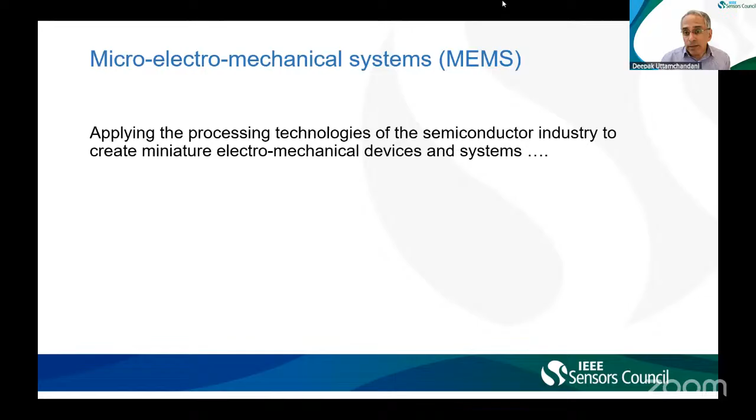Okay, so now everyone here knows what MEMS are. So it's applying the processing technologies of the semiconductor industry to create these micromechanical devices and systems. And why do you create them? For this reason, that there are numerous applications of these devices. These are just some of the examples.

In sensing and instrumentation, you have these devices. In communications: RF switches, resonators, impedance tuning, photonics, so many applications in comms. In transport, all the vehicles most of us travel in nowadays, you have accelerometers, pressure sensors in your vehicles. These are all MEMS-based products. In aerospace, you have MEMS devices for guidance and navigation.

In medical technology, you have them. In life sciences, you have them. And so there are many papers out there that describe these applications. So I don't want to focus too much time on that, just to remind you that the applications are quite diverse. Okay, so what has been our experience with using MEMS foundries? These may not apply to every single person, but this certainly is how I think about it.

So if we look at the plus sides, the advantages of doing this, then we see that the foundries provide to you a reliable process technology, which they have already developed. They have invested the money and time to make sure that these technologies are available to us as the users. So that technology is already readily available.

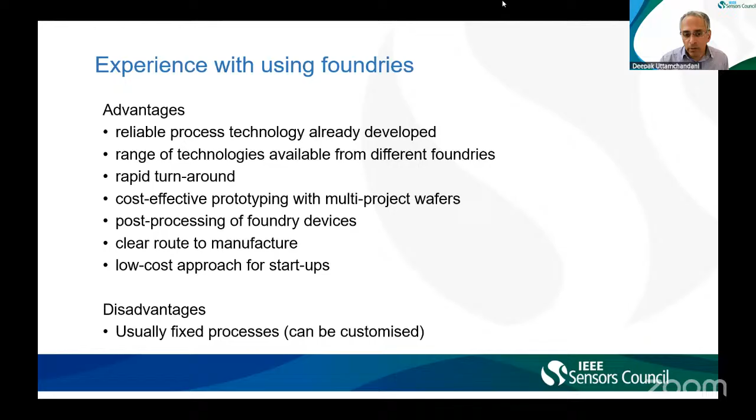So the one main disadvantage I'm showing over here is that with foundries, you usually have fixed processes because they have spent lots of money, lots of time to optimize their processes. Now, if you come along and say you want to change this, you want to change that, generally speaking, they will not be receptive to you. So that is something you have to bear in mind when you're trying to go down this route.

So here are some illustrations of devices that we have worked with for many years. And these are actually using different processes. So here on the first diagram, these are all scanning electron SEM images, okay? This is a very interesting device. It's what we call a latching RF switch. And what's going on here? So RF is radio frequency.

And this side of the image over here, where I'm showing you, this is an RF waveguide. In fact, it's a microwave waveguide. It's of the GSG configuration, meaning ground signal ground configuration. So through this center channel over here, microwaves will travel. Now you can see what we have designed over here.

We have designed this break in the waveguide, which is connected to this mechanical system over here. And the idea is that I can use these micro actuators, all these MEMS devices, and I can pull this structure to the left. If I pull this arrow-shaped structure to the left, then you can see that this waveguide is interrupted and the signal flow will stop.

If I push this arrow structure to the right, then this arrow fits into this gap, and then there is good continuity and the signal will transmit through. The important thing here is that this movement is handled by these micro actuators.

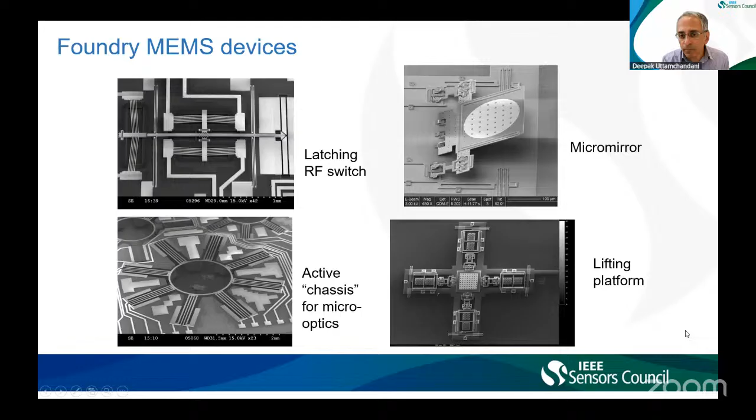Okay. So let me describe the first of the three processes I want to discuss with you today. And this is about the polysilicon process. In the past, when we were using it, it was called the PolyMUMPs process, and it was provided for us through the MEMSCAP Foundry based in the US, but it has been taken over, and the new owners, who are the Science Foundry, call it the polysilicon process, but it's essentially the same.

So I don't want you to focus on all the details over here because it's a complex structure, but just bear in mind that in this process, we have three polysilicon layers, okay? Poly 0, poly 1, poly 2, that's three layers. We have deposited oxides, which are sacrificial, so that's the oxide layer there. We have silicon nitride, which is the black layer here, which isolates the device from the underlying silicon. We also have metal. So this is our toolkit.

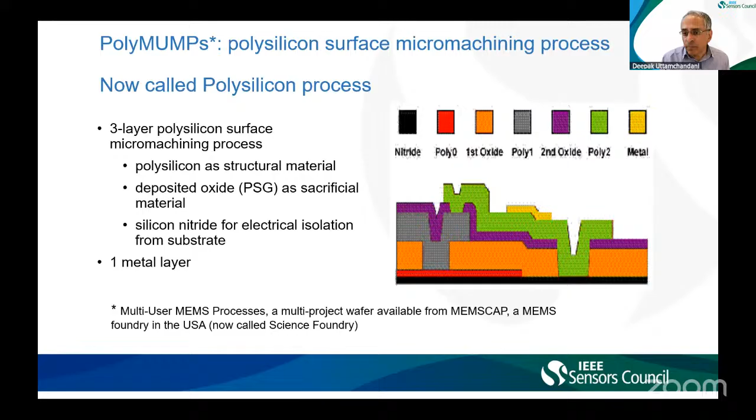So what do I have in my toolkit? I have in my toolkit these 7 layers. And I have the ability and creativity to do something with these 7 layers, how to design with them. So what can I do with them? So let me show you the first device we have. This is a device which is a micro actuator. It's called the SDA, a scratch drive actuator.

So first I'll turn your attention to the right-hand side of this slide. And in fact, these two pictures are the same, except the lower picture is in color to make it a little clearer. And what I've done is I've designed this device over here, and you can see the corresponding layer. So we have parts of the device called clips. They are made in poly 2. We have this gray plate, which is also poly 2. We have bushing, and I'll explain that to you. And we have the sliders, and we have the rail, which are in poly 1 and poly 0. So these are all the layers of the polysilicon process, okay?

What is this and how does it work? So it's an actuator, a micro actuator. And the left hand here shows you what it is. So here is the silicon substrate. This gray represents the insulation, which is the silicon nitride dielectric. And this L-shaped piece over here is also polysilicon, okay?

And if you look at it, this is like a capacitor, because if I apply a voltage between the top and the bottom, the top may have a positive charge, the bottom may have a negative charge. And what happens? If you have a positive and negative charge, they attract towards each other. So it means that this very thin bit over there is attracted to the bottom and it bends downwards.

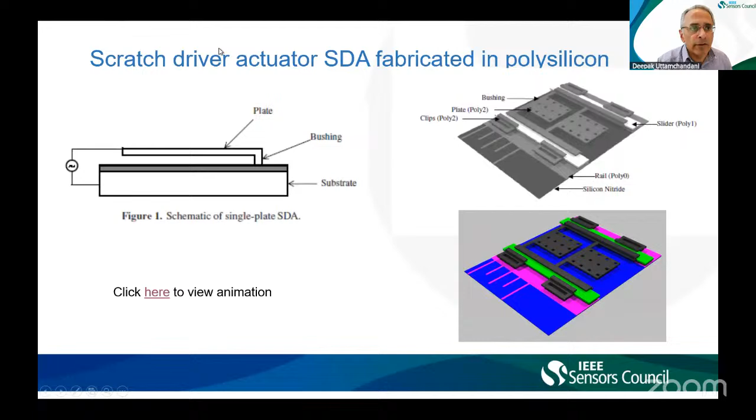So, where am I? Close. So I've lost myself. Why have I lost myself here? Okay, sorry about that. I think I was trying to do these. Some of these are old recordings, so I had to make some adaptations to them. Okay, and it might jump around a bit. So let's see if we can avoid that. So let me move to the next slide.

This is an actual image, a recording of this micro actuator. We call it a three-stage actuator because these three squares represent each stage. And now if I click on this, you can see that it moves forward. It's moving forward at an average velocity of 20 microns per second. But you can clearly see that it's moving from 0 up to 900 microns, almost 1 millimeter. So this is one of our first micro actuators.

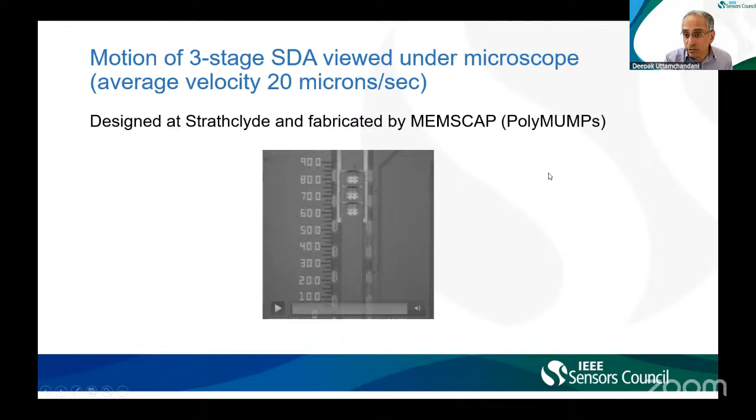So when we built this type of device, the first thing we thought was, well, this is a great device, but how much force does it produce? Because if you have an actuator, your actuator is trying to do some work. And usually that work is it's trying to position something, it's trying to pull something. So we built this simple structure here. It's a test structure to try to measure the force of the actuator.

And what you see we have over here is what's called a box spring. It's a spring. And when this actuator operates, it pulls and stretches the spring. And when the equilibrium is achieved between the force of the actuator and the restoring force of the spring, we can actually measure the displacement of the spring. And if you know the spring constant, and we actually work out the spring constant by calculation, if you multiply the spring constant by displacement, that product has units of force.

So you see here we have a diagram which shows different actuators from 1 plate up to 4 plates. Here we have worked out the force, and here we have worked out the voltage that is actually applied. So you can see that, for example, I can get something like 900 micronewtons of force out of a 4-plate actuator if I apply like 200 volts to it. So this gives me some understanding of what kind of objects I can push and pull using these actuators.

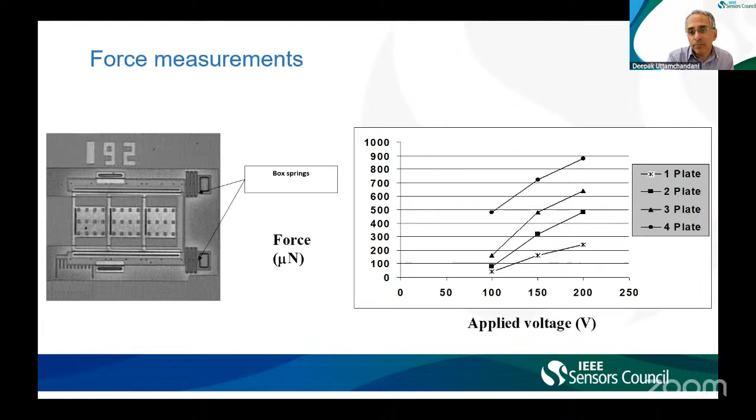Now, if I click this slide, you see what happens. You see how this mirror has now been pulled into the vertical position. So in doing this, we have applied this actuator to, yeah, okay, now I know what I'm doing. I need to pull this down and close that. Okay, so we've used this actuator here to pull up this mirror. It's doing something functional. The mirror is going from horizontal to vertical.

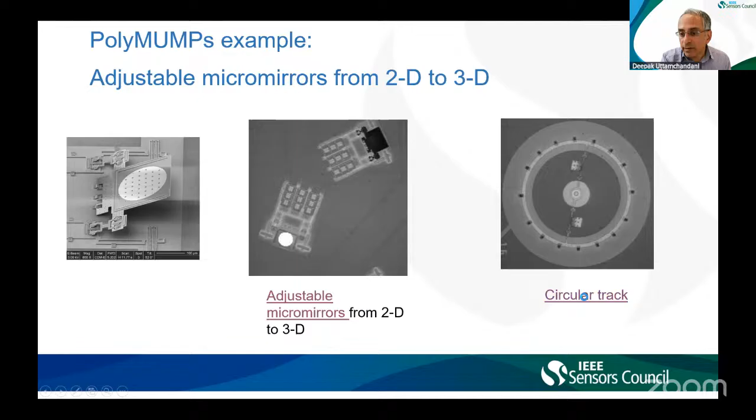This slide here shows you that these devices don't necessarily have to move in a straight line. If I click here, then you can see that I can also make a circular motion using these types of actuators. So they are not always linear, they can also be circular.

Okay, so quit that and I'll close that. And I'll move to the next slide. So those are some examples of the polysilicon process, and there it requires a really good understanding of what you're doing. Now, this is SOIMUMPs. Nowadays, it's called SOI process.

And I believe last year, those of you who were trained on the MEMS course were trained on using this process, SOI process. So I won't go through all the details. I just want you to look at F over here in the bottom right. What this allows me to do is create a silicon structure which is completely suspended. It's suspended because using a back etching process, I can remove all the underlying substrate material.

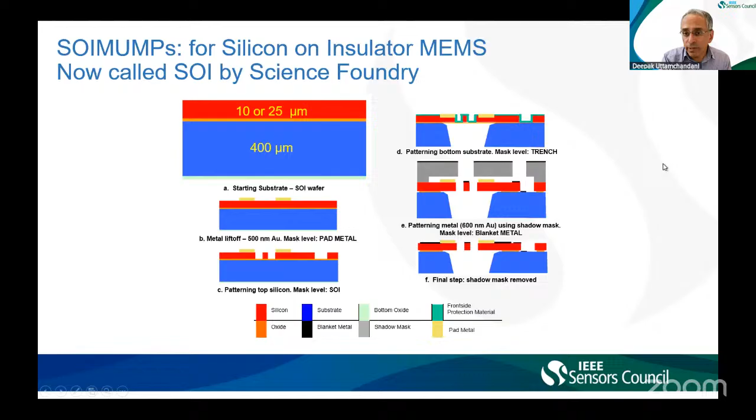And then on the top side, I can put in different types of materials. Usually we use metals. So this gold structure is what's called pad metal. There's pad metal and there's blanket metal. But these are definitions which I think you will have understood through your training. So what do we do with this type of process? Here's one of the devices we made early on.

It's again a micro mirror because, as I said, our interest is in optics and photonics. This is a circular micro mirror. It's 800 microns in diameter. And on this side and on this side, we have what are called electrostatic actuators. The thing about electrostatic actuators is that one set of actuators is connected to the structure, one set is connected to the surrounding silicon. So you have, again, like a capacitor, and that capacitor generates a force within it.

So here we have done two simulations. The diagram on the top shows the first modeled tilting mode of the actuator, and we modeled it to be 11 kilohertz. When we measured it, it was about 10.2 kilohertz. So there's good agreement. And the tilting is around this axis over here, so it's tilting from side to side.

The second mode, we'd say it's a second tilting mode. It has a 42 kilohertz model, and when we measured it, it was 41.7 kilohertz. So again, there's good agreement. And here you can see the tilting almost follows this S shape. So you can see how this mode is quite different from this mode over here.

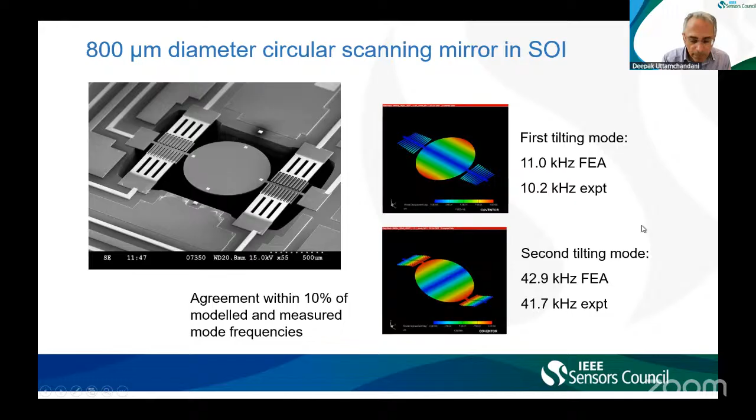Just checking my time here.

So this is a different variation of the previous structure. The only difference is that instead of a circular mirror, we have a square mirror. We wanted to understand the effect of having these square corners on the overall design and the overall production of the structures.

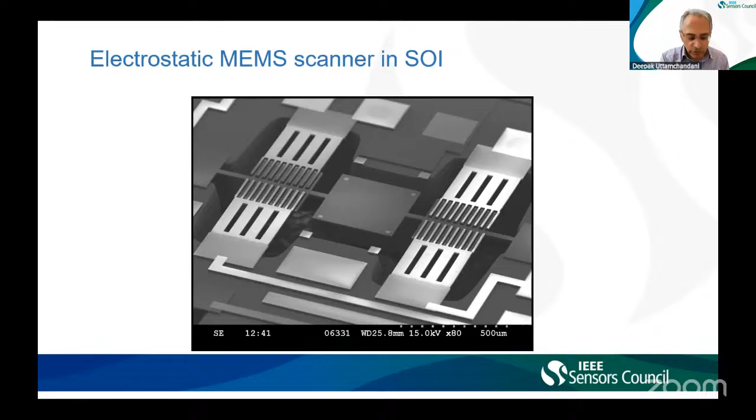This and the next image I'll show you are really very interesting. We have a kit called a dynamic profiler. With this equipment, you can put a MEMS device within it, operate the device, and actually visualize and measure the dynamic behavior of the device. So this image is not some simulation image. This is actually the device sitting in the equipment, and this is data which we captured.

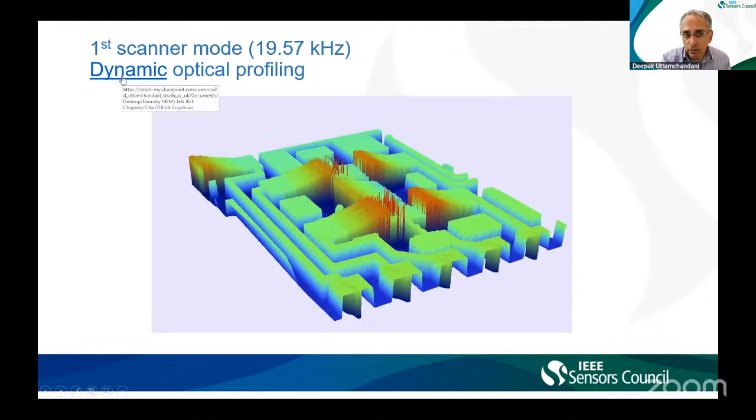So if I click this here, you see how this device is moving from side to side. I hope you can see that quite clearly. I'll run it one more time just to show you. So these are actual measurements made on that device at that particular frequency.

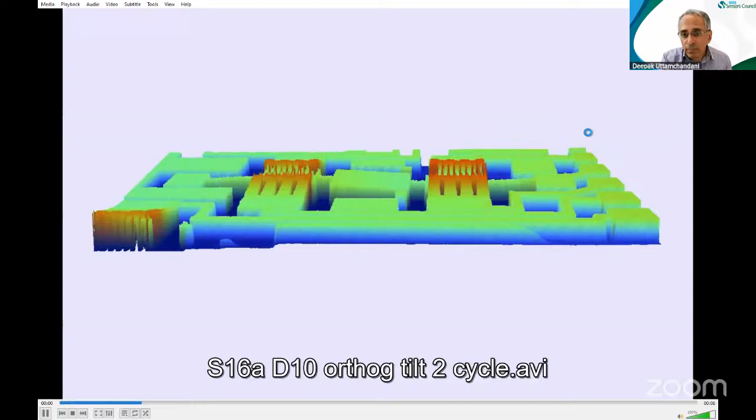And if I move to the next slide, this is the second mode of that structure. The same device, just taken from a different angle. Now we're at 37 kilohertz. If I click on that, you'll see it's moving in a different mode, in this S shape that I showed you before. So that kind of equipment is an important facility to have in order to measure the dynamic behavior of these devices. We've done many of these analyses.

What you find is that, sorry, let me go back. For what we call our small mirrors, when they're tilting, you have plus minus 14 degrees in the first mode and plus minus 2 degrees in the second mode. The larger mirrors give you different behaviors. Large mirror with frame, I don't have time to discuss, but they also give different behaviors. So these are the typical characteristics of such a device.

This is what happens if you take one of these devices and you operate both axes at different frequencies. So what we have over here is one axis is being driven at 10.25 kilohertz, and the second axis is being driven at exactly 4 times that number. So 4 times 10.25 is 41 kilohertz, okay?

And when you do that and operate that, what you're seeing over here is we are shining a laser beam onto the mirror and then bouncing it from the mirror onto the screen. Okay, and I think many of you will have seen these types of images before. These are the Lissajous patterns, and it just shows you how the optical beam can be deflected and given this kind of shape onto a screen. And you can move it fast and slow depending on what kind of frequencies are applied. Okay.

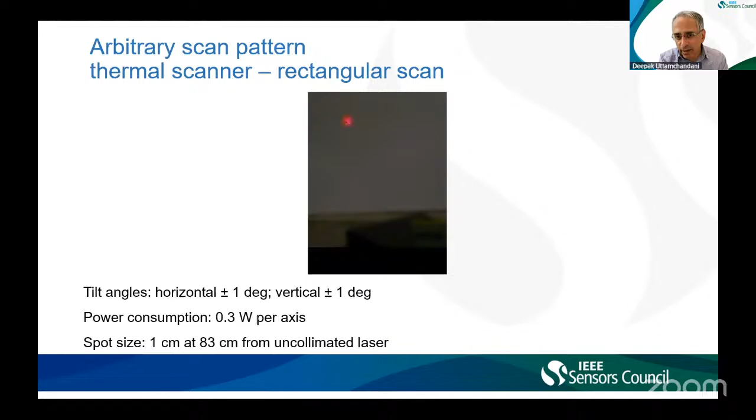This is a different type of scan pattern I'll show you. It's a different kind of actuator. It's what we call a thermal scanner. But interestingly, you can see we can do quite interesting movement and shapes with this type of structure. It's a different design. It relies on heat rather than electrostatics. And then working with the same design, the same kind of actuator, I can create some more complex patterns. I have these kind of spiral patterns that we can generate, as you can see. This is all in the visible, but of course it can be done in the infrared as well, okay?

And here is if I use a camera and just extend the exposure and look at those spirals, you can see here we're getting spirals. We can here also get concentric circles. So it's a way of generating patterns from the laser beam in a simple way.

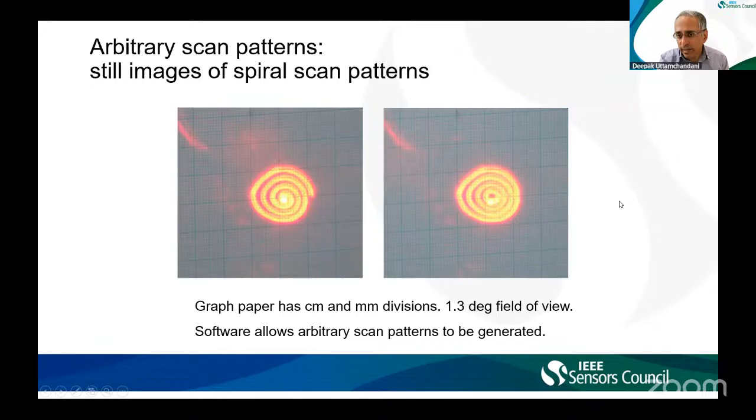Now, you can be more complex. You can use the scanner which I showed you, with its pattern generation, but you can use that with a modulated laser, which you can switch on and off, and you can really get some interesting patterns with it. So this is a LabVIEW environment we're working in over here, and we created a program to allow us to draw real objects.

What's happening here? The laser beam is scanning from left to right. So imagine it's scanning as my arrow is going left to right, and it comes back left to right, and that's fine. But then at this point, what we do is we switch off the laser. So now there's no light. So if there's no light, it means there's black over here. So during this period, the light is switched off. But then over here, once again, we switch on the laser and keep scanning.

So if you coordinate between your scanning and switching the laser on and off, you can start getting some really interesting patterns. You end up getting laser projection. So whether you call this number 5 or letter S, you can see that this is the letter S. I hope that's clear to you on your screen.

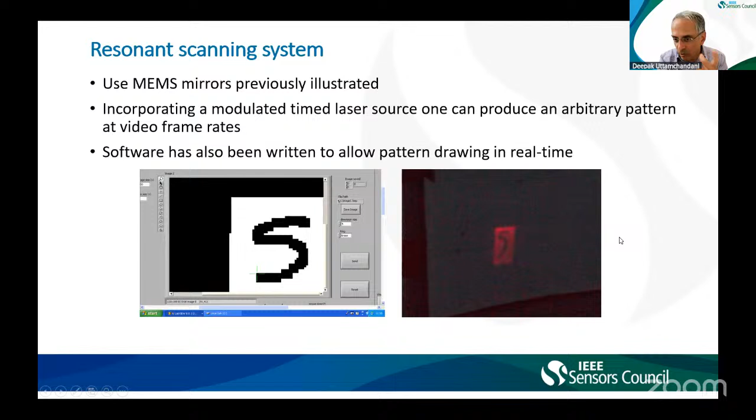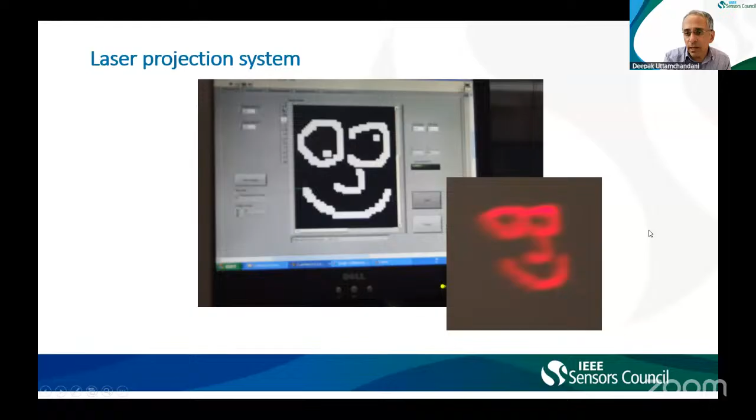And you can then make it more fun. You can make it more complex. So this is the same LabVIEW environment. This is the design we wanted to create. Okay. And then you can see by just putting that design here, you can project that design here. It's done with a red laser. Okay. And then here we can even create a figure of Homer Simpson. The thing to bear in mind is that with the laser, you can also get grayscale because you can change the intensity of the laser beam.

So not only can you switch a laser on and off, but you can also change the amount of light coming out of the laser. You can make it very bright, fully on. You can make it half on, quarter on, all the way to 0. So if you are able to change the intensity of the laser and coordinate that with the program, you can even get these gray scales.

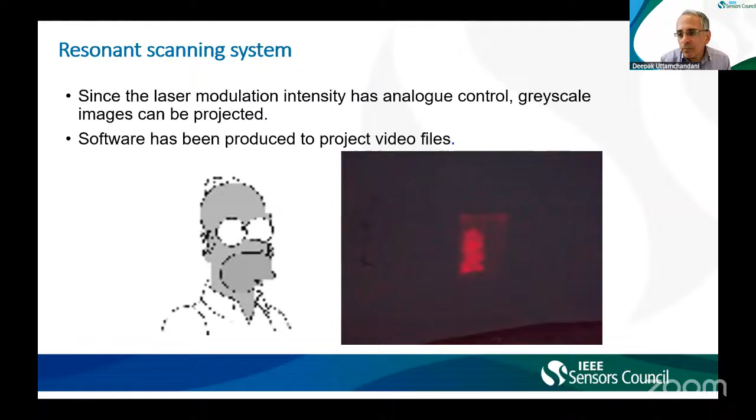And it may not be so clear in the screen over here, but if you just look through half closed eyes, you might just be able to make out this pattern of Homer Simpson here. Okay, so that was referencing the two types of scanners. They were electrostatic and they were thermal scanners. But we also create what are called hybrid scanners.

So what is a hybrid scanner? With a hybrid device, what you can do is you can take two different actuation modes. I've already mentioned to you electrostatic actuation and electrothermal actuation. And what I'm saying here is that I can create a device in which I combine electrostatic actuation as well as electrothermal actuation and try to get the benefits of both technologies.

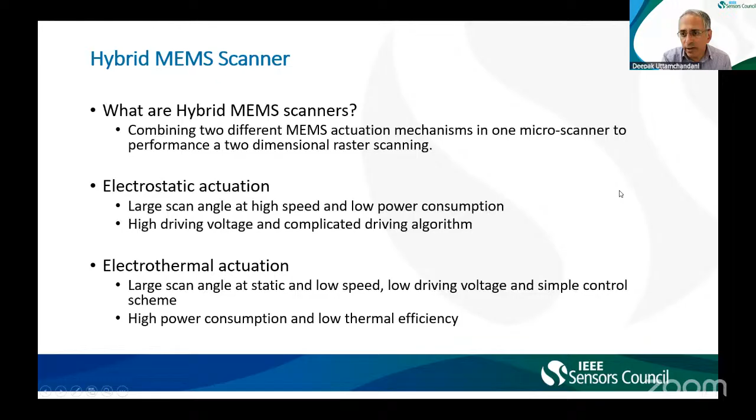With electrostatic actuation, I actually have large scan angles, but I have to have high voltage and a complicated algorithm to drive it. With electrothermal actuation, I get large scan angles also, but low speed, but I have low driving voltage and simple control. But the electrothermal does require higher power consumption. So these are the different characteristics of the different actuations.

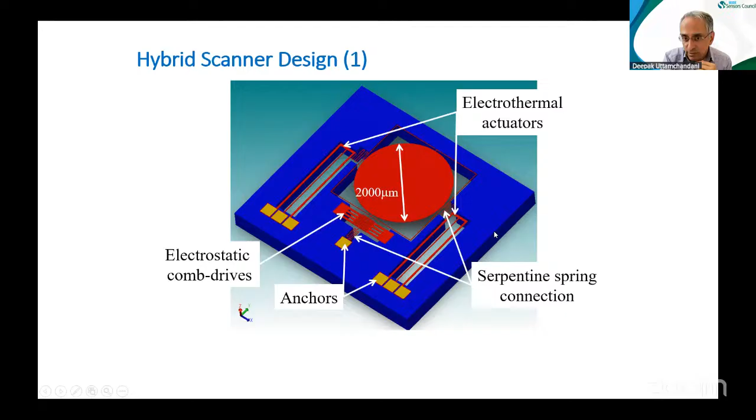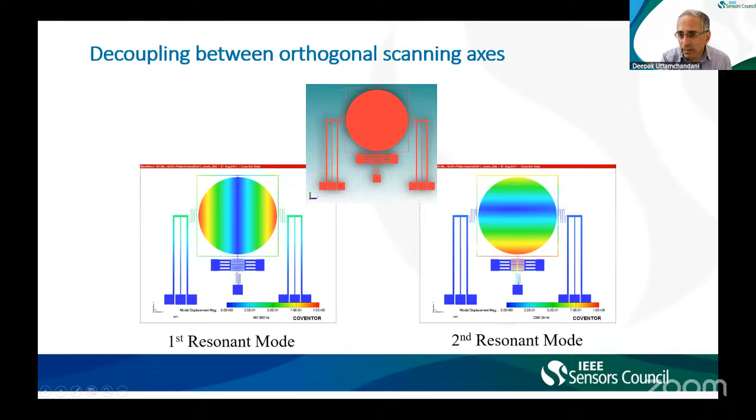So that is about those particular devices, which is mainly the scanners. I'm just taking a pause here to check how my time is going. Okay, I've got about 10 minutes left.

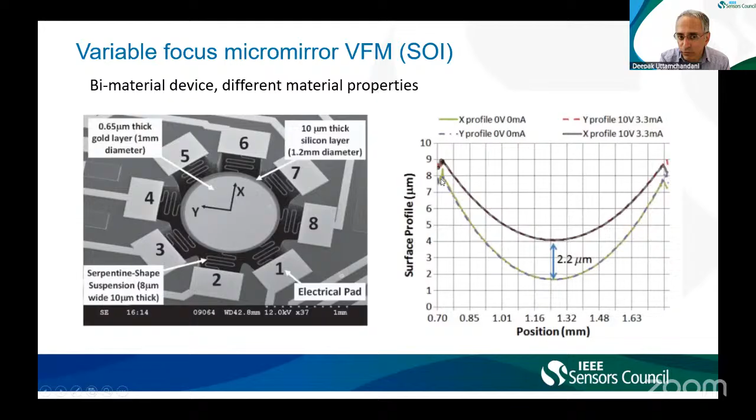What happens is that if I pass an electric current between these electrodes, I begin to heat up the device. And when this device heats up, because of differential thermal expansion between the gold and the underlying silicon, the curvature of this device changes. And that's very interesting.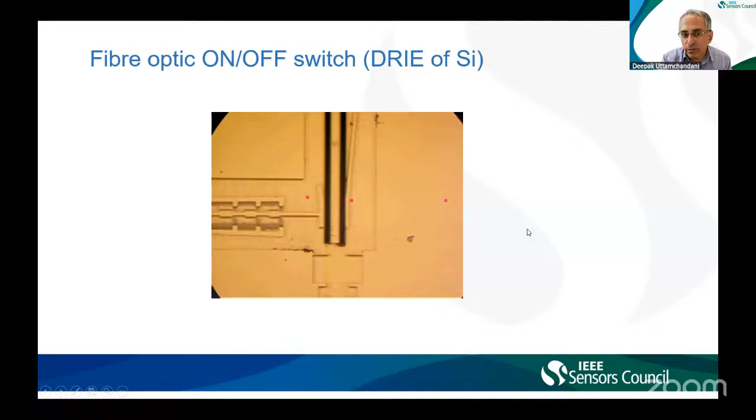This structure actually shows you in more detail some of that actuator side. These are some of the teeth. We call this a vernier actuator. And in this actuator, we have a whole sequence of teeth over here. And we have these spring-loaded teeth and the teeth on the moving part. And what you find is that at some position, the teeth on both sides come into alignment. And when they come into alignment, this locking takes place. And then the actuator is locked in its new position.

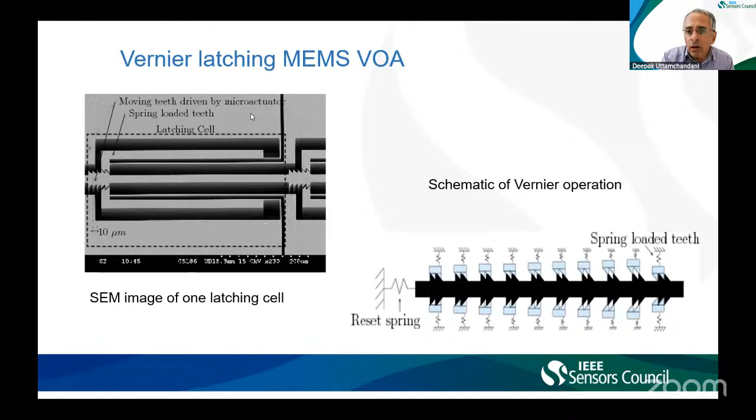What's interesting about this is that here we've done some measurements. We have 30 latched points right over here in a space of 18 microns, which means that we have been able to make 30 fixed points within 18 microns. So each fixed point is a little over half a micron. It's 2/3 of a micron, about 650, 660 nanometers. 18 divided by 30, convert that into nanometers.

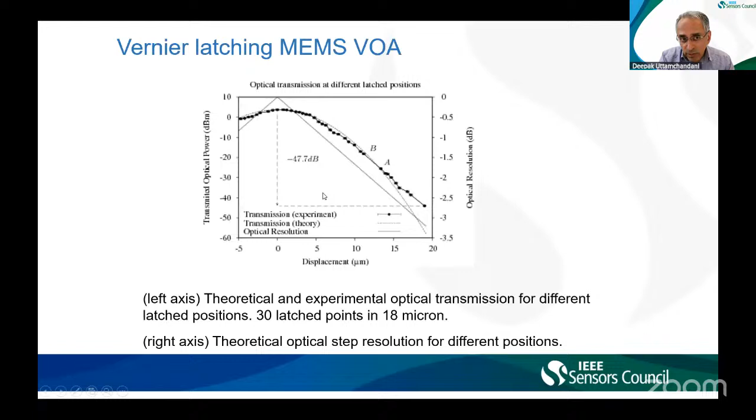So here is the interesting thing. I'm using micron technology, which gives me structures which are 3, 5, 10, 15, 20 microns, and yet I'm handling with a precision of 600 nanometers. So this is what the vernier latching process allows us to do.

So next, I want to talk about the PiezoMUMPs process. Some of you may have heard about the PiezoMUMPs process. Again, it's been around for a while. I just want you to focus on image F over here, down here. This is exactly SOIMUMPs, with one difference. The difference is that the fabrication process allows you to deposit aluminum nitride on the surface of the device.

And those of you who know that aluminum nitride is a piezoelectric material, so if you apply voltage to it, it'll displace, it'll deflect. If you apply AC voltage, you will get AC vibration out of this aluminum nitride film. Okay, so it's a way to also actuate devices.

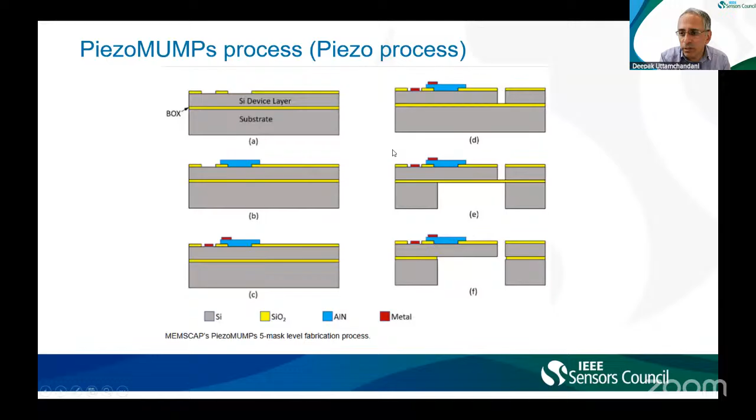So I'll show you one device we've made. We built many devices; I'll just show you one of them. This one here. So this is a high frequency piezo scanner. Okay, and this diagram is indeed complex because we were trying to do 3 experiments on one device, in order to get leverage out of using this technology. But essentially what we have in this device is around here you have an actuation which is based on aluminum nitride, which is a piezo material.

In the center here you have a scanning mirror, so this is in fact an aluminum coated mirror over here. And then on the sides over here, we have different actuators, but the ones I want you to concentrate on is what we call actuator 1, single-track actuator 1, single-track actuator 2.

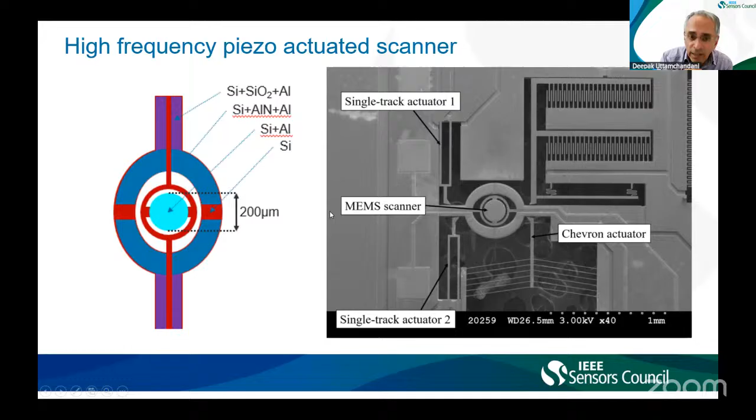And what we're trying to do is see that if we apply heat to this actuator, can this heat be transferred to this micro mirror device, change its temperature, change its stiffness, and therefore change its mechanical frequency, its resonance frequency? And the answer is, in fact, you can do it. So here's some data we have. So here's the device, okay?

We have this mode over here, what we call the piston mode. The device is moving up and down. We have what we call the orthogonal tip mode, and that has its resonance frequency here. And then we have the tilt mode, which we have over here, this third mode. And you see that for each mode, we have the modeled frequency, okay?

But what you see is that in some of the modeling, the compatibility is good, but in other modeling, the compatibility is actually not very good. So look at this one over here. This mode, the piston mode, we expect to have 154 kilohertz in the model, but it's only 130 kilohertz in practice. This second mode, the orthogonal tip mode, we expect it to be around 220 kilohertz, but look, its real measurement is around 140.

So this third mode over here is what we call a tilt mode. And the tilt mode is the one where the agreement is the best. In theory, we expect 180. And in fact, in practice, we also measured 180. And the question is, why is this difference? Actually, you can see even in this graphic what's happening. Look at this one here, 180.

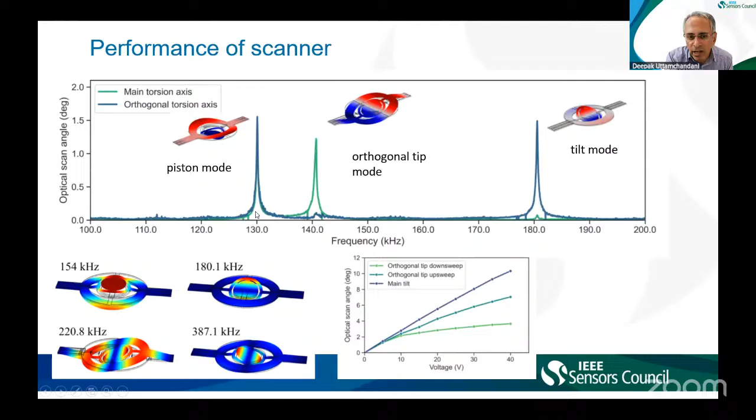And then if you look over here, what I call the piston mode, you can see these colors are less, which means the structure around is moving less. The main movement is over here, but there's still some movement around the side. That's why we measure 130 versus 154.

Okay. Very quickly, this is how the frequency tuning took place. So we apply thermal effects in the way I described a few moments ago. And you can see that for one of these modes, the tip mode, we can tune the frequency from this point here all the way up to this point over here. These are relatively small changes, but important.

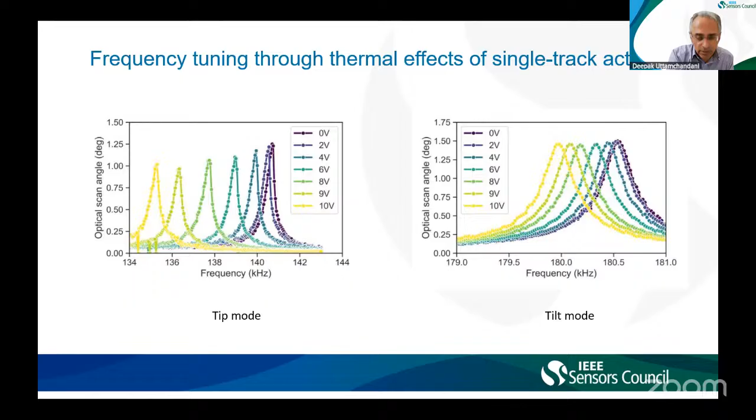Okay, so here we are, right on time. Last comments and my last few observations. First, this is a lesson: you do not need to have your own fab and full processing capability to conduct research in MEMS. Okay, you don't need to have that.

Two, if you are fabless, it allows you to access a wide range of technologies which you do not need to maintain. So in a way, less is more. You have less in your own institution, but you have more access to the different foundries.

Three is that you can post-process dies from a fab using your own custom material. So we were able to do that. We put in various silica niobia layers to create multi-layer dielectrics, but there are other kinds of materials you can deposit if you wish to do that.

Next is that it would be really good if we had more multi-project wafers from fabs around the world. The reality is that multi-project wafers don't make a lot of money for the people who own the fabs, so it is less of a priority for them because of these types of reasons.

Finally, with multi-project wafers, you need to think more deeply. You need to be creative in how you can differentiate your work from other people who are using the same processes. But I hope I've been able to show you in the last period that you can create devices, you can still do a lot of research, and you can go ahead and publish a lot of material.